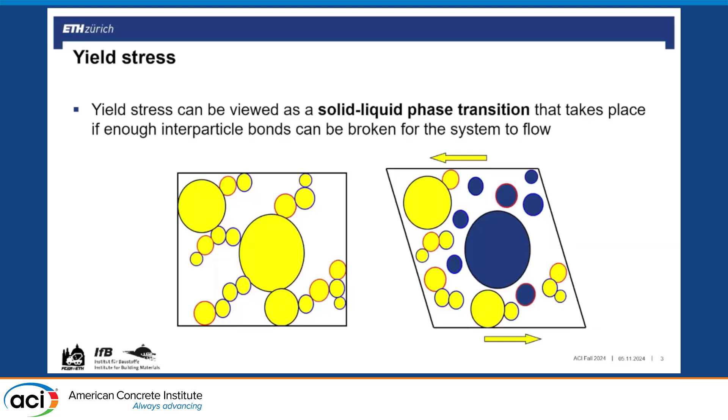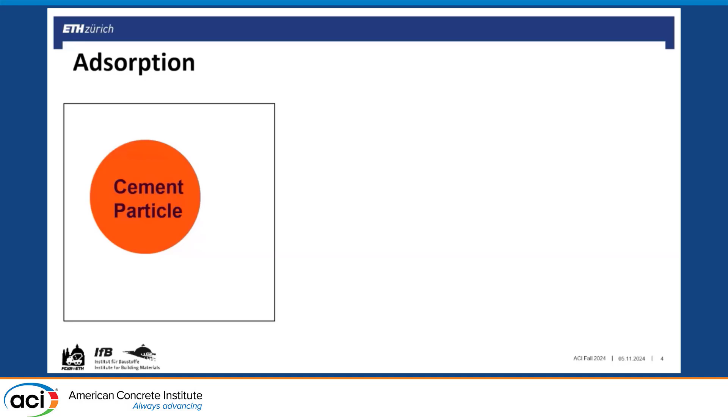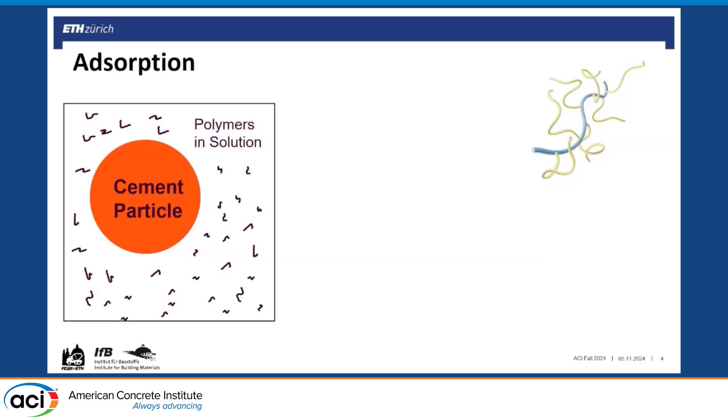So as you can imagine, the volume content of solids plays a major role in your yield stress, but also things that modify the interparticle forces, including polymers, which can adsorb to the surface of our cement particles. So if we take a polymer, a typical comb-shaped superplasticizer, it's got a backbone, that's the blue, charged so that it can affiliate to the surface of our particle, and side chains that stick out like a comb, hence the name comb-shaped superplasticizer. They are floating around in solution, they're attracted to the cement particle, they operate by adsorbing to the surface of the cement particle.

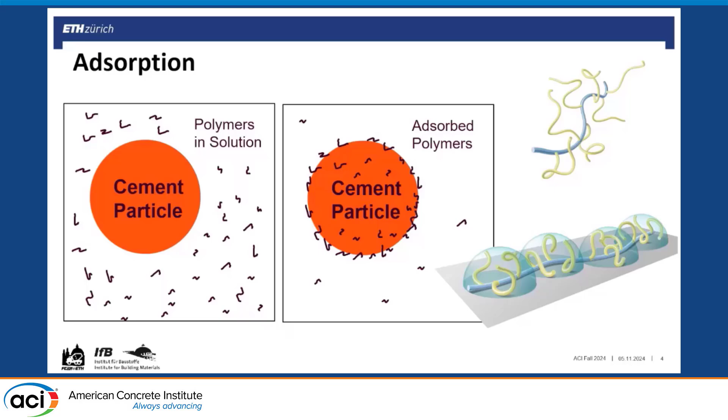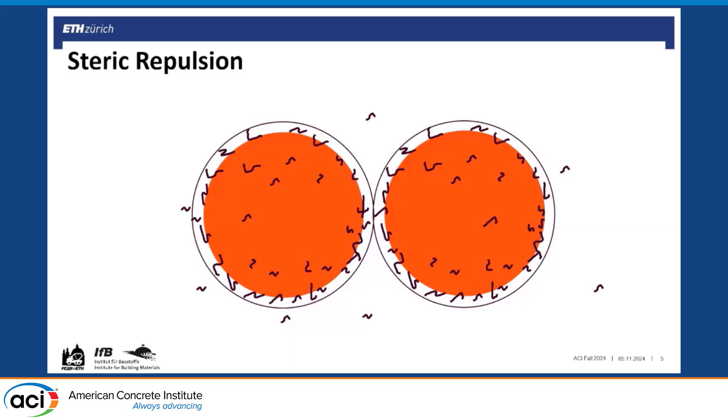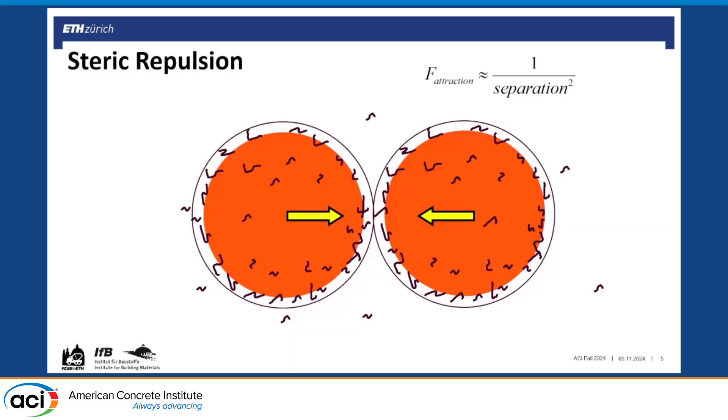They adopt a particular conformation, which Robert produced a model some years ago to predict the amount of surface coverage that you can get with given molecular parameters for a polycarboxylate ether superplasticizer. And they modify the interparticle forces through something called steric repulsion. Essentially, the steric repulsion means that atoms can't occupy the same space, so they essentially push the particles apart. The attractive force between the particles follows an inverse square law. So it doesn't really take that much to push them apart to modify the interparticle force significantly.

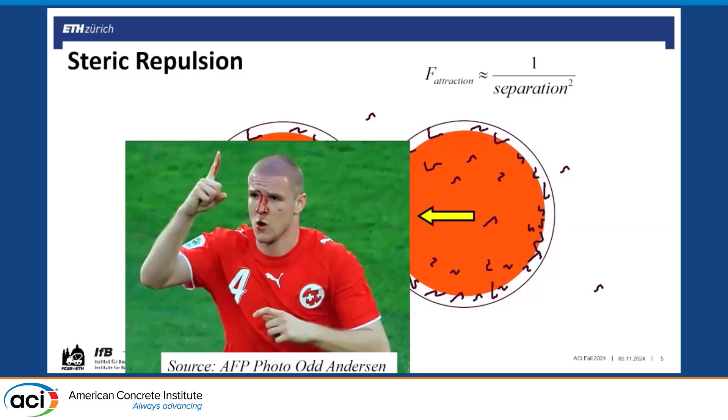And to give you a sense of the relative sizes we're dealing with here, this is a Swiss footballer. The hairs on his head are akin to roughly the surface thickness of the polymer on the cement particles.

Now, what the polymers do to change the interparticle forces is dependent on a couple of things. It's dependent on surface coverage as well as the thickness of the layer.

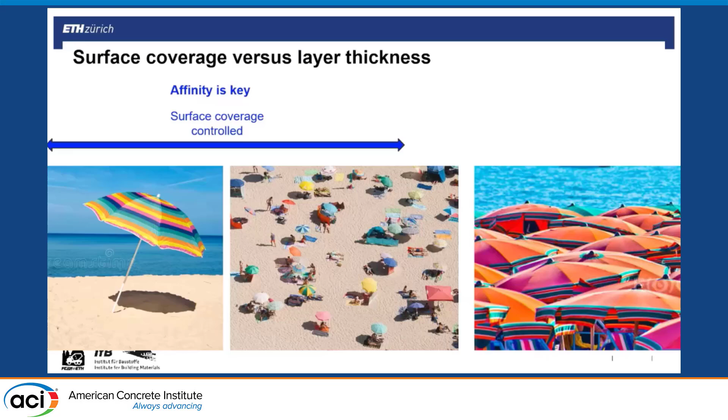So first you've got to cover the surface, like you have this beach here. You want to cover the surface of this beach with shade first, and at that stage, with the analogy of the particles, the actual surface coverage is key, so the affinity of the particle to the surface is important, and essentially what that comes down to is the charge of the backbone to stick to the surface of the charged particle. Once it gets covered, then conformation starts to become a big deal, and the actual side chains and the layer thickness becomes the key. And typically, we're in the range of surface coverage control, is my understanding.

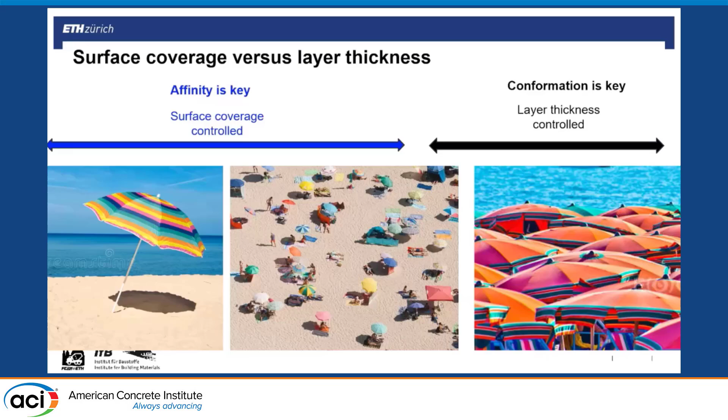Now, with blended cements, things start to become much more complicated because we're no longer dealing with sticking this superplasticizer to the surface of our clinker surfaces. Now we have other things like limestone, calcined clay, and other supplementary cementitious materials. This talk is going to be about LC3, so I'll be focusing on these three surfaces.

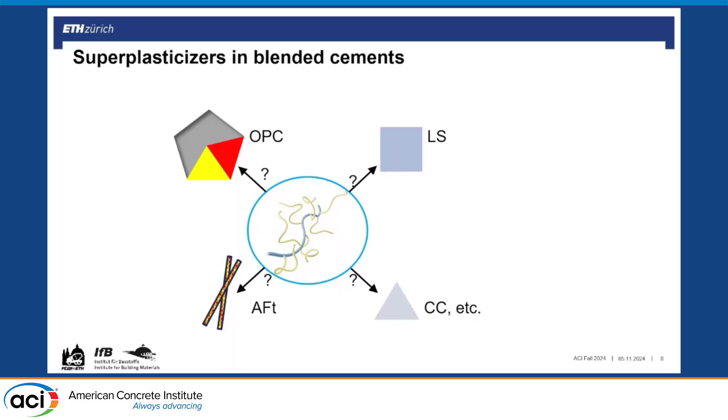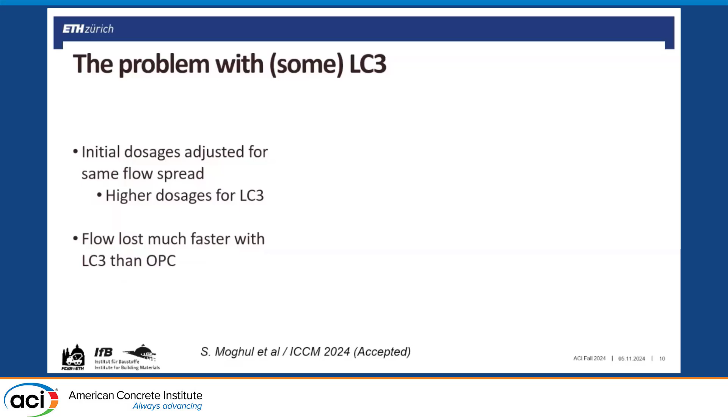And then you also have surfaces that are growing, hydration reactions that are occurring and forming things like ettringite or other hydrates that can occur in the early ages. And where this superplasticizer is going is a major question and a focus of the work, a lot of the work in the group for the past three years or so, and especially how it changes with time. Now, what that means then for LC3s is what I'll get into now. And the problem with some LC3s, LC3 is quite variable because the calcined clays are coming from quite variable sources, and some of these, as we know, can lead to workability problems, and it's illustrated here.

Taking the same, first of all, these are the same initial fluidities, the same initial yield stresses for LC3 and OPC systems. One of the things you'll note is the higher content of superplasticizer needed for the LC3 system because of the higher specific surface area, presumably. You can see that the flow is lost much, much faster with LC3 compared to OPC.

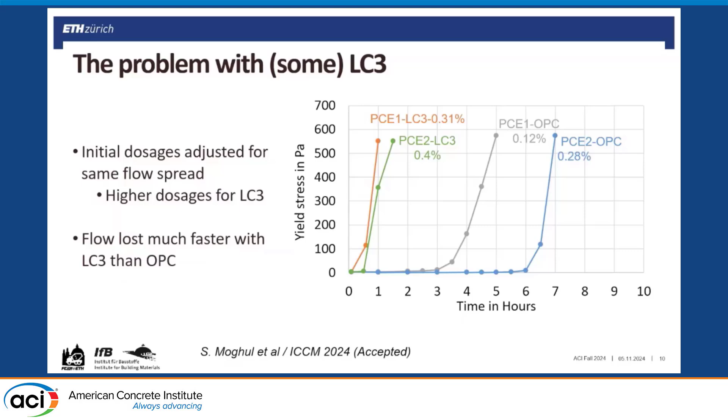So this is the increase in the yield stress over time. Schematically, on the y-axis you have the yield stress, the x-axis time. Typically, what happens with OPCs is you have a given yield stress, and then at a certain time, the yield stress starts to increase. This is our flow retention time, when that starts taking off. You can add a little bit more superplasticizer initially, lower the initial yield stress, and then get a corresponding increase in your flow retention time, and so on.

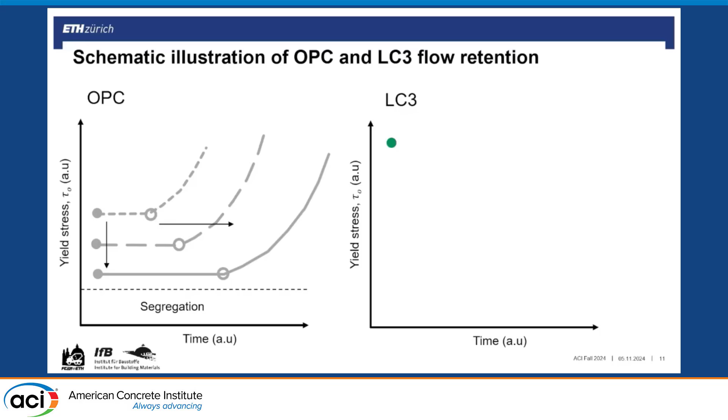So there's essentially a corresponding increase in flow retention time with a decrease in yield stress. There's a limit on it where you'll cause segregation and an unstable suspension, so you can't do it forever. The difference with LC3: I just wanted to highlight that lower yield stress and increased PCE give increased flow retention time. With LC3, you have to add a little bit more PCE, a little bit more superplasticizer, in the beginning, but the flow retention time is shorter, and regardless of how much you add to lower that initial yield stress, your flow retention time is still not improved, even below the segregation limit.

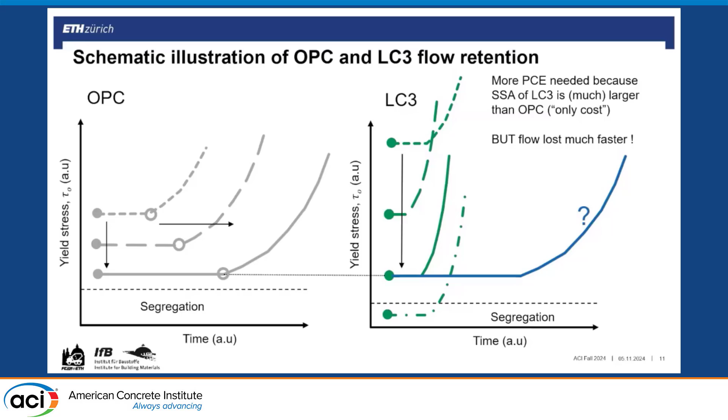Essentially, what a lot of people are doing in dealing with LC3s is to add a much higher initial PCE to take care of all that additional surface area. It's a little bit of extra cost, but that's how you deal with it. However, you still end up with this flow retention problem. So the question is, how do we get to something like this?

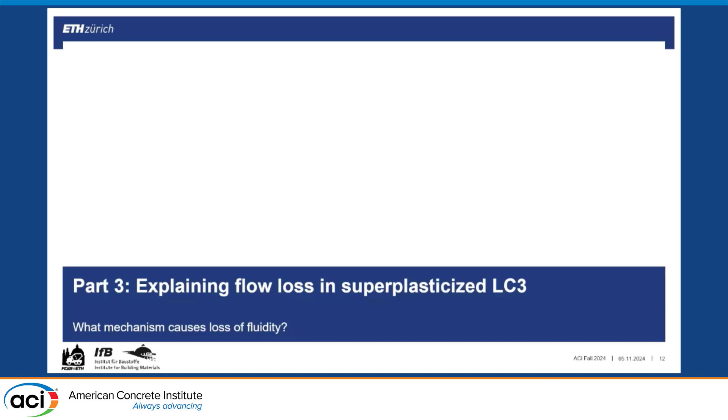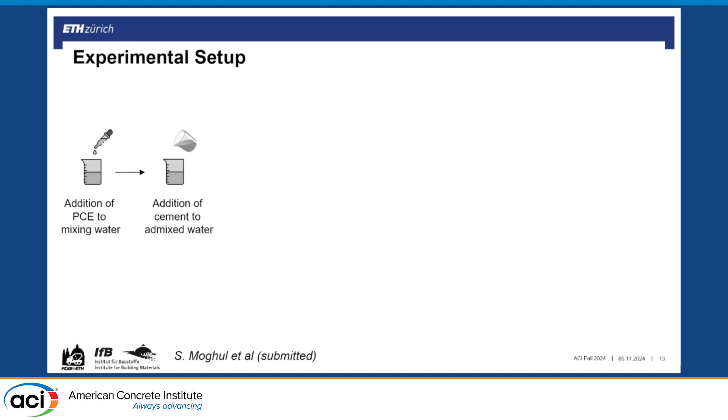The first step that Suraj took was to try to do some experiments to explain flow loss. What's the mechanism that causes LC3 to lose fluidity? The experiment he did was adding PCE in the mixing water, adding the cement, mixing it up, and then he went in one of two directions with it: flow loss compensation or no flow loss compensation. With flow loss compensation, as you start losing flow, you redose more PCE to get back to your initial fluidity

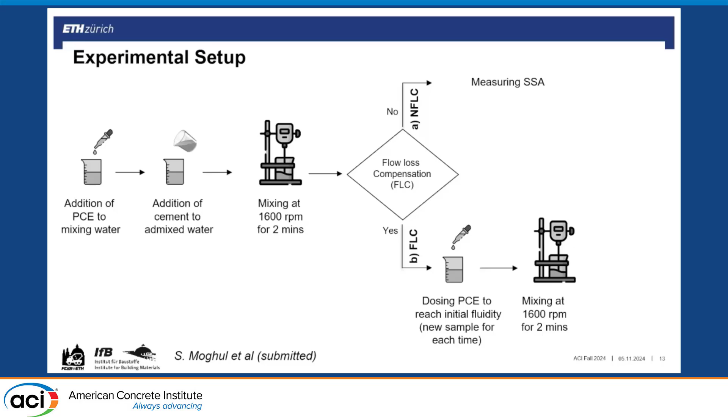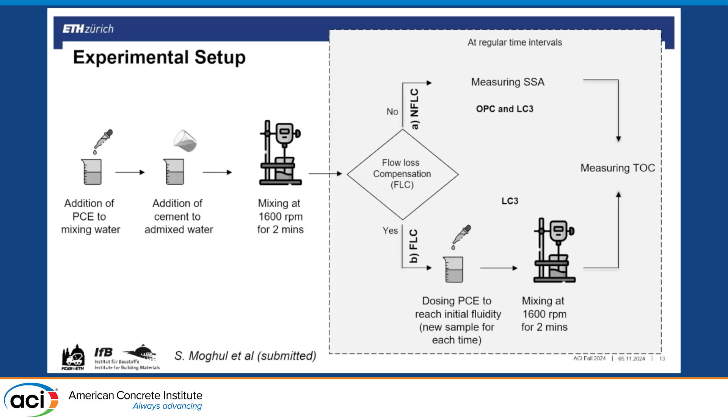and mix it up, get your fluidity back. In the case of no flow loss compensation, or NFLC, he'd measure the specific surface area evolution over time. And in the case of both of these, he would then measure, using TOC, the amount of adsorbed polymer, and do this at regular time intervals. The flow loss compensation was only done for LC3, and the NFLC for OPC and LC3 systems to get this proper comparison.

So how does the specific surface area evolve? This is for OPC, and this is for the non-flow loss compensated LC3. And while they look similar, take a look at the scales. On the left is OPC, on the right is LC3, and you can see it's roughly a 4x increase in the specific surface area for the LC3 in the same amount of time. So not only is there a higher initial specific surface area, it's also massively increasing. It's a higher growth rate over time.

If you look at the amount of adsorbed polymer in the OPC system, it's increasing over time. In the case of the non-flow loss compensated LC3, there's a marginal increase in the amount that's adsorbed over time. And in the case of the flow loss compensated, it also follows an increase in time of adsorbed polymer, because you're adding more polymer. So this is showing, again, just drawing some lines through the previous plot, the growth in the specific surface area over time with a 4 or 5x increase, and highlighting, of course, the higher initial specific surface area as well as the higher growth rate.

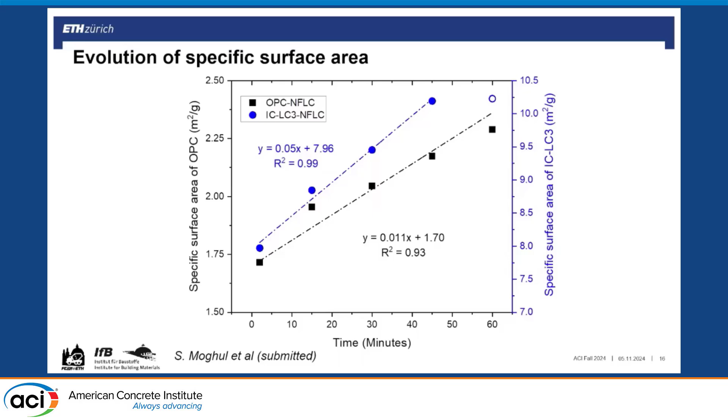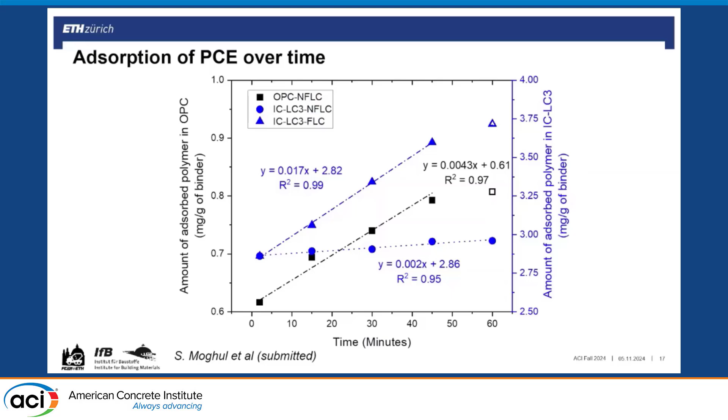These are for the non-flow loss compensated ones. If you draw lines through the amount of adsorbed polymer, you can see that some outliers were removed to be able to get roughly the same initial amount seen here, but there's an order of magnitude difference in how much polymer is being adsorbed in the flow loss compensated versus the not flow loss compensated LC3s. Even the amount that's being adsorbed over time for the non-flow loss compensated LC3 is lower compared to the OPC. This is an indication that you just don't have a lot of polymer floating around in the solution. A lot of it's just consumed initially.

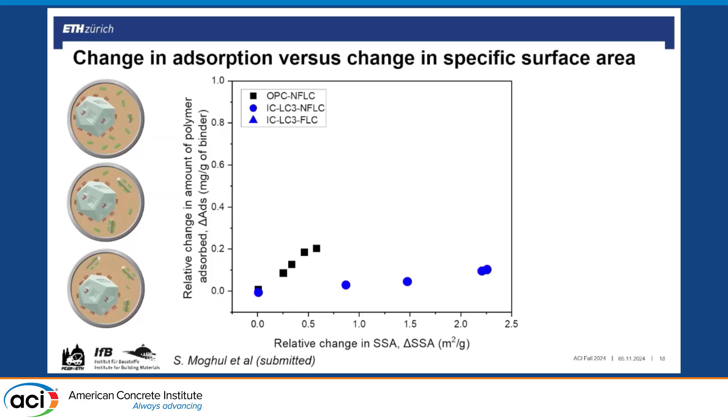In the case of non-flow loss compensated LC3, the hypothesis is just that there is not a lot of free polymer floating around in the solution. And then as you form more specific surface area, the high charge polymers, or the polymers adsorbed on cement or clinker particles, will then migrate to the new surface area, and that's the source of your flow loss, at least according to this hypothesis. And in the case of flow loss compensation, as you're adding more polymer, it's adsorbing to the newly formed surface area.

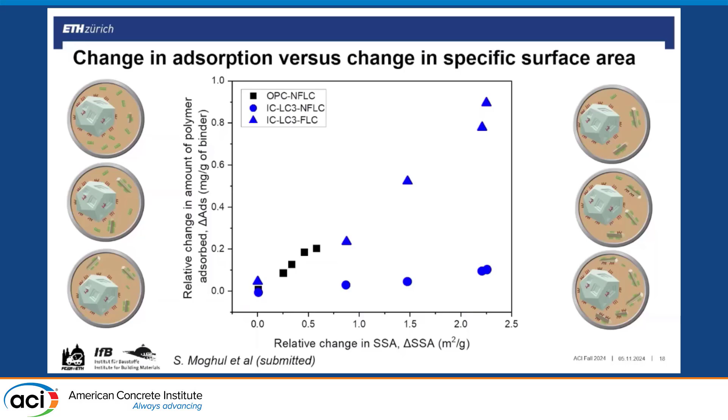And if you plot a straight line through these results, you can see that the OPC and the flow loss compensated LC3s are falling roughly on the same line. And as it turns out, the slope of this line can be closely predicted by the model developed by Robert some years ago. In the model calculation, at least from what I read in the submitted paper, so it's still in review, is something like 0.32 or 33. So it's a pretty close prediction, indicating that there's fairly good surface coverage on the surfaces that are being formed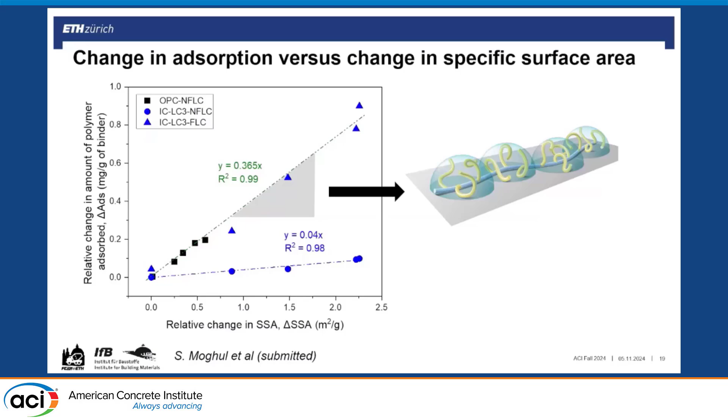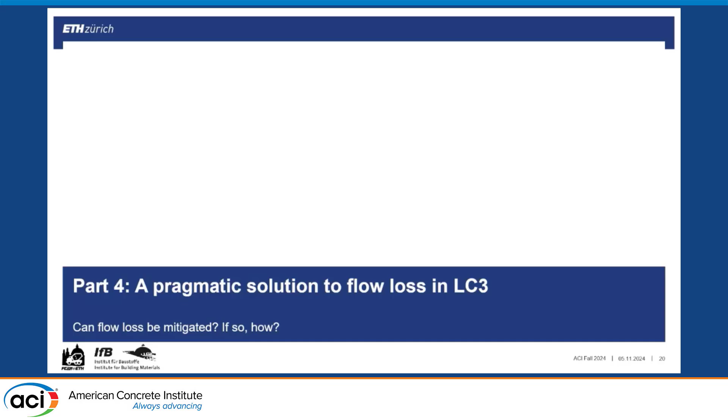in LC3. All this to say that essentially it seems that the evidence indicates that it's the newly formed, rapidly forming specific surface area in LC3 which is responsible for the flow loss. So when it comes to a pragmatic solution for it, there's a couple of directions you can take. On the one hand, you can add a polymer that doesn't adsorb initially but has a stronger affinity for the new surfaces that you are forming. But this doesn't attack the issue at its root and potentially can require quite high dosages. So an alternative approach, which I'll show here, is to block the initial reactivity to prevent the formation of all this surface area from the outset.

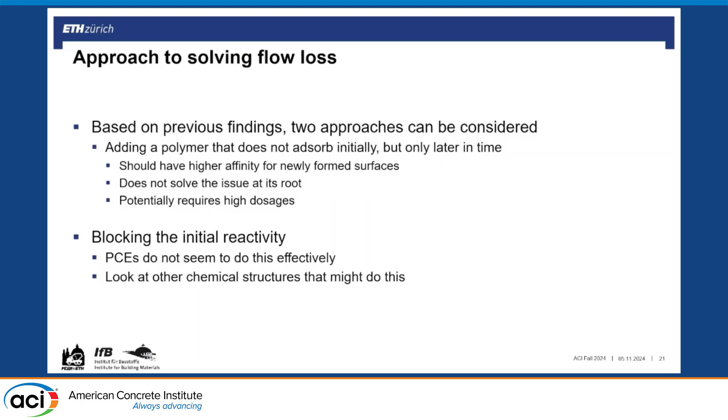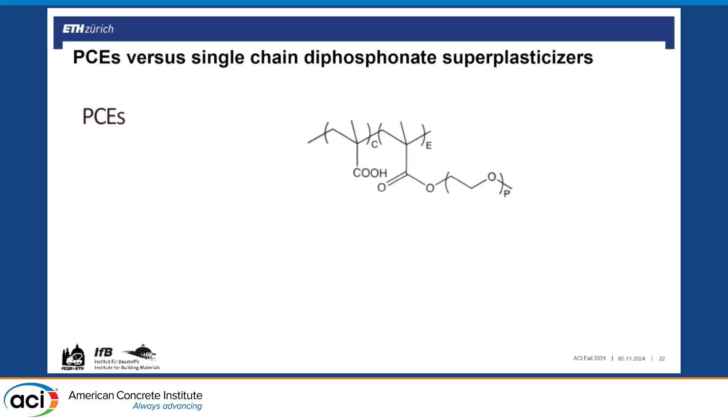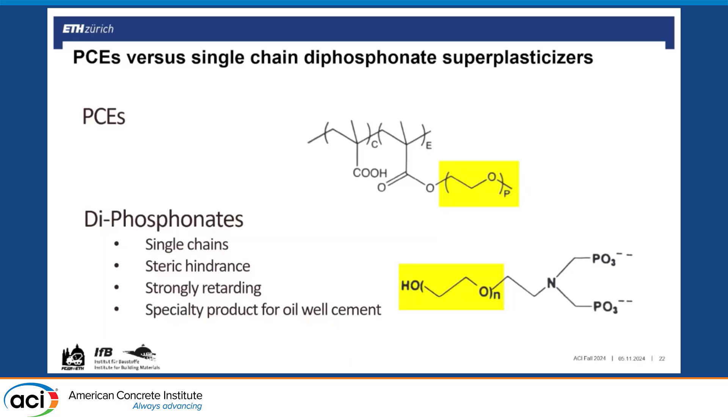PCEs don't seem to be very good at this, but in the context of a student project a year ago that Suraj supervised, they looked at some other chemical structures that might do this, in particular the diphosphonate superplasticizers. So this is what a PCE looks like schematically, and a diphosphonate looks like this. And the diphosphonates operate on a similar principle. They operate based on steric hindrance, but they are single chains. So that's the chain of the diphosphonate there on the bottom, analogous to the PCE side chain as well. But as they're single chains, instead of a comb copolymer, they're just like a single tooth of a comb. They are strongly retarding and have been a specialty product for oil well cements until now.

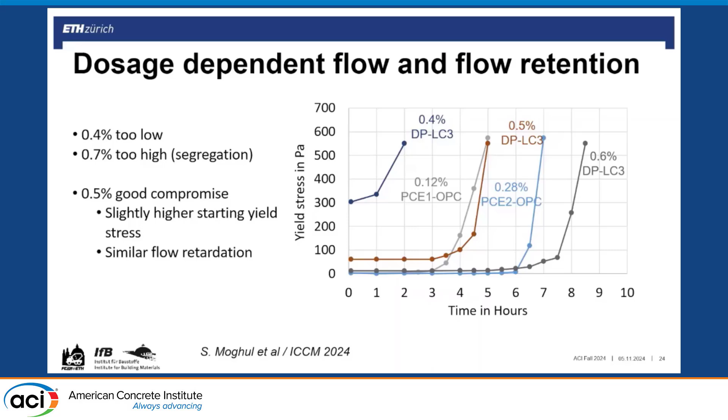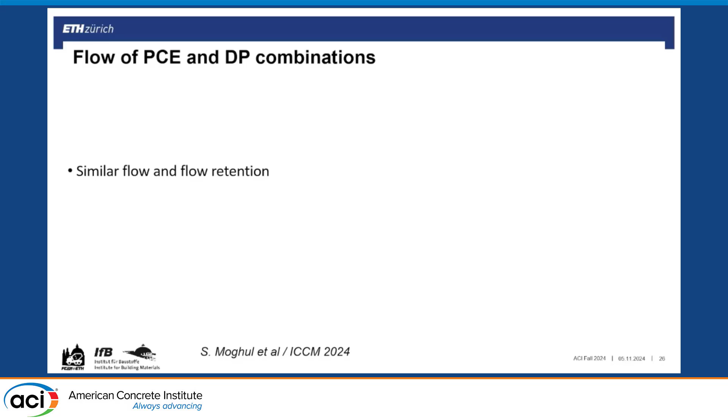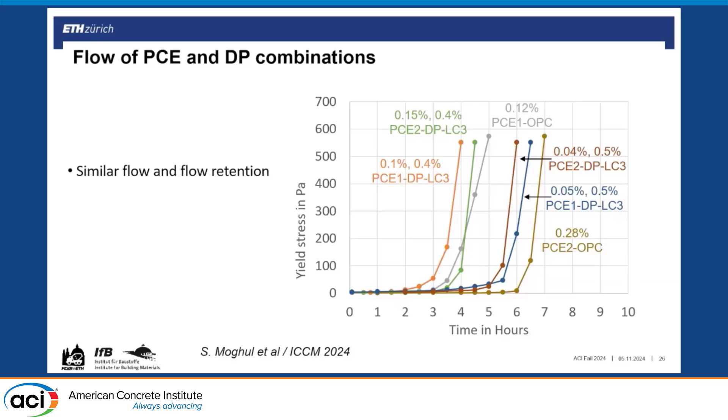In the context of this project, they found that 0.4% was a little bit too low, and that you got segregation at 0.7%, just to get lower and upper ranges to test things out. Using 0.5 and 0.6, you can see that 0.6% actually looks pretty good, but 0.5% is probably also a good compromise. So you get the low initial yield stress that you need and the flow retention that you need as well. The problem with it is that there's excessive retardation that occurs, as you can see in these calorimetry curves. And so what they looked at was this combination of PCE and diphosphonate together. In other words, to use the PCE, where they're trying to replicate these curves, and the idea is to use the PCE to drop your initial yield stress down to what you need, and then the diphosphonate is going to take over to be able to give you the flow retention that you need. You can see they got pretty good matching results from these LC3 and combination of PCE systems.

Now, a significant question behind this is exactly where and how these superplasticizers are doing this. What are the phases which are responsible for the increase in specific surface area? Maybe it's the amorphous phases in the calcined clays, for example, and how this evolves over time. This is work to come.

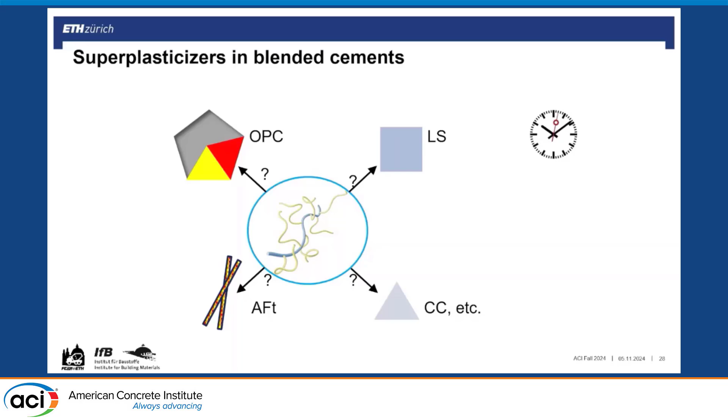So to conclude, I think a takeaway is that the rapid formation of additional surfaces is responsible really directly for the flow loss of superplasticized LC3s. I didn't show any of the evidence here, it's in the submitted paper, but evidently side chain intercalation does not play a major role. Covering these surfaces is what compensates flow loss with polymers that you can add later or can have a delayed adsorption, potentially with a low dosage response, but it seems like blocking the early reactivity is quite promising with the diphosphonates. It's a different class of superplasticizers. And again, it's really coming down to getting that right combination to get your lower initial fluidity as well as the flow retention that you need.